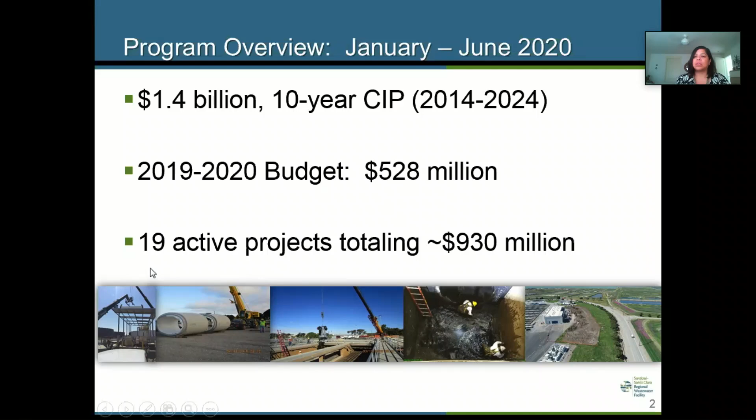Thank you, Mariana. As Mariana mentioned, I'm David Olson, Division Manager with ESD.

For our significant program activities, in February staff finalized the biosolids procurement strategy and implementation plan. The plan recommended a short-term strategy of procuring contracts for hauling and disposing of biosolids processed by the future dewatering facility at the plant, and a longer-term strategy potentially consisting of a combination of a partner facility, city farm, and/or long-term hauling disposition contracts. Staff has begun the procurement and environmental review process for the short-term contracts.

This past fall, staff completed the construction management readiness assessment. The objective was to evaluate the current construction management program and identify any improvements needed to effectively manage the increased number of projects in construction at the plant. Over the past year, staff has implemented a number of these recommendations, including updated processes and procedures, hiring an experienced consultant deputy principal construction manager, adding interim cost and scheduling resources, training city staff on best practices and new procedures, and procuring additional third-party construction management and controls resources.

At a program level, we continue to focus on recruitment and retention. During the second half of this fiscal year, we filled 7 of our vacancies, including a new principal engineer position to oversee our facilities projects.

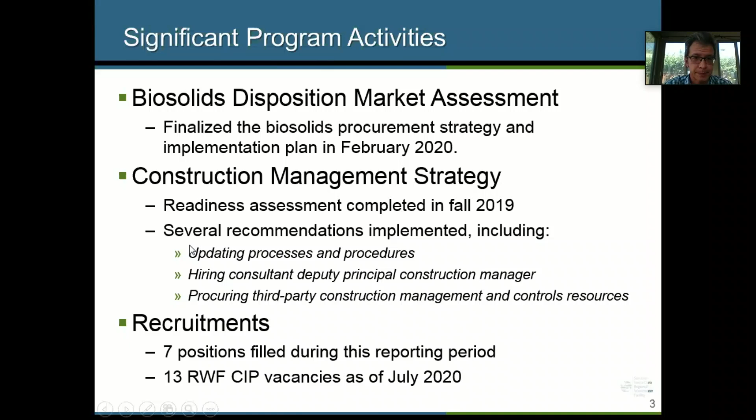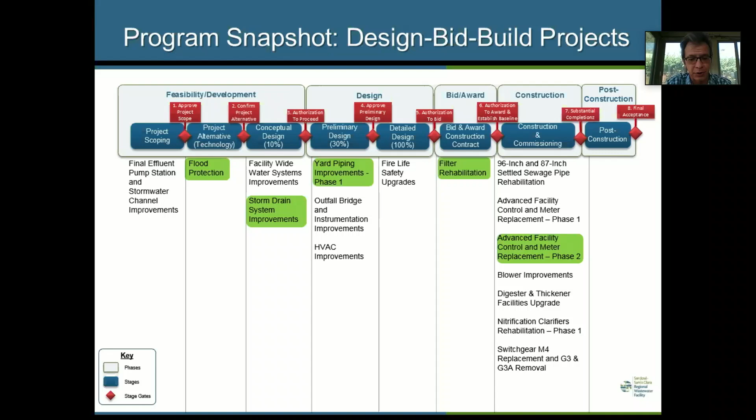As mentioned earlier, we had 19 active projects during the second half of last fiscal year. This chart shows the 16 projects being delivered using the traditional design bid build delivery method. The projects highlighted in green are the ones that advanced a stage in our project delivery model during this reporting period.

Our other 3 projects are being delivered using the progressive design build approach. During this period, our Headworks project, one of our largest projects in the program, began construction. In summary, we had 4 projects in feasibility, 6 in design, and 9 in construction.

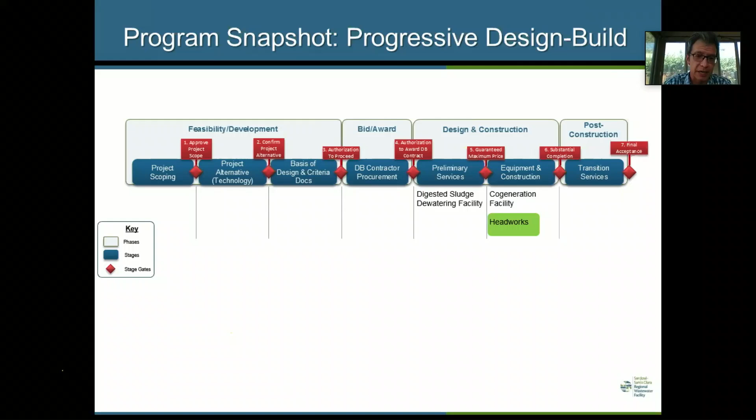Of the 4 projects in feasibility, we continue to scope 2 of those: final effluent pump station and flood protection. We completed the alternatives analysis and began conceptual design for our storm drain system improvements project, and also completed the conceptual design for our facility-wide water systems project pictured here. We finalized the bid documents for an exploratory trenching contract that will help us locate utilities and pipelines to better inform the project's design.

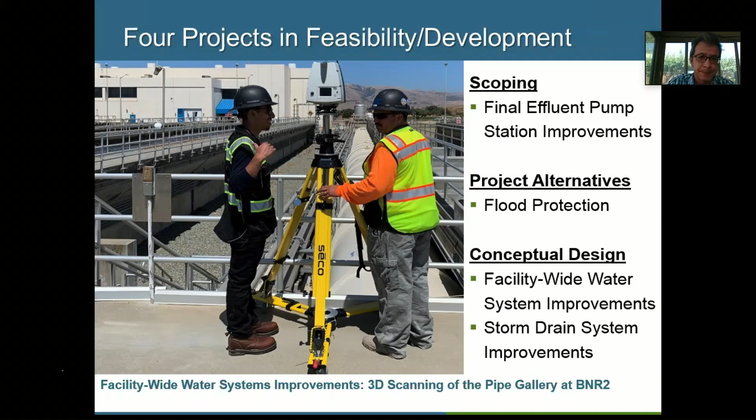For the yard piping improvements phase 1 project, we completed the conceptual and preliminary designs. For dewatering, we conducted several design workshops with the design builder and RWF staff. We also tested a number of centrifuges and visited other facilities to help establish performance standards for the new facility. The design builder also submitted the basis of design report.

Finally, for the filter rehabilitation project, we completed the final design during this period. We also advertised the project in March, opened bids in June, and will be recommending construction award of that project to TPAC and Council this month. Now I will hand it over to Norm to share the construction highlights.

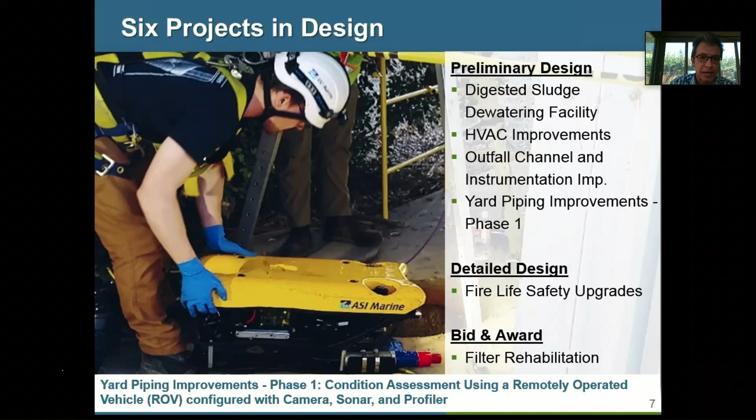Thank you, David. Good afternoon, everyone. I'm Norm Mascarinas, the principal engineer overseeing construction management at the regional wastewater facility. I'll be sharing some of the highlights from the construction activities that occurred in the facility during the second half of fiscal year 1920.

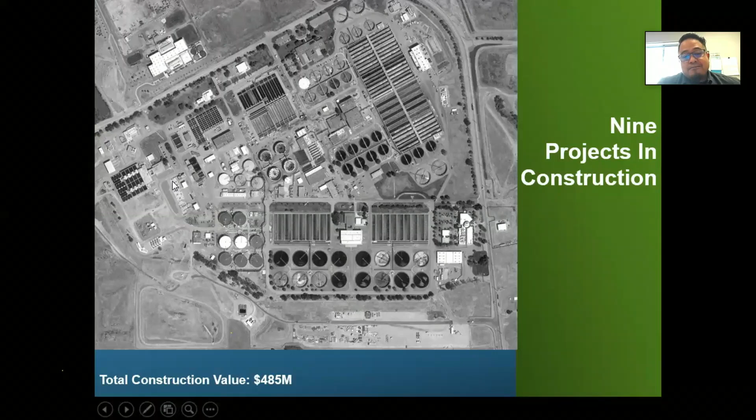As you can see from the graphic, we had 9 projects in various stages of construction dispersed throughout the facility. Therefore, the CM readiness assessment, which David discussed earlier, was critical. You'll notice that the project sites often overlap, and as a result, a lot of effort is done to coordinate construction activities to ensure safety, minimize conflicts, as well as avoid construction delays.

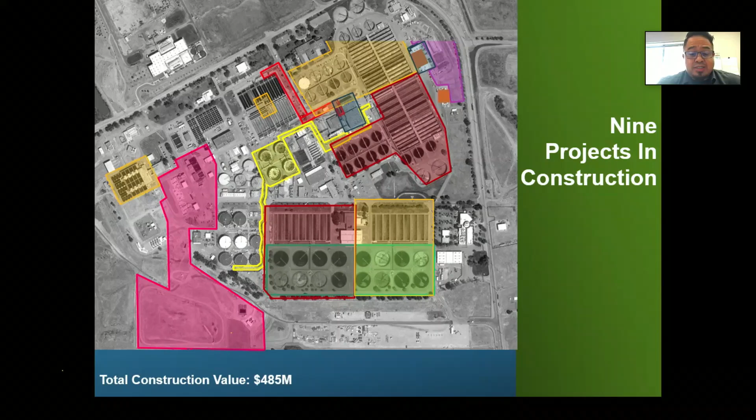The first project I'd like to highlight is the 96-inch and 87-inch settled sewage pipe rehabilitation project. This project scope is made up of 2 pipe segments: the first being the 96-inch pipe, and the second being the elliptical or oval pipe with dimensions of 87-inch by 136. Together, these pipe segments are part of the settled sewage system and are critical pipelines at the RWF. They convey primary effluent to the settled sewage pump station.

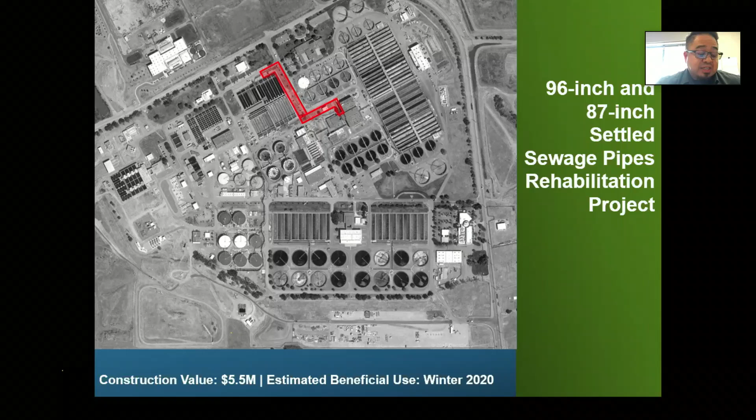Then the flow is distributed to the secondary treatment process for further treatment. A condition assessment on the pipes was conducted in 2017 and 2018 and confirmed crown corrosion in sections of the pipes for both the 96-inch and the large oval pipeline.

As part of the rehabilitation process for these pipes, the segments must be cleaned and free of debris. The photo on the left shows a Vactor truck being used to remove sludge and debris from the oval pipeline. The photo on the right shows contractor staff lowering a remotely operated vehicle, or ROV, into the oval pipeline. The ROV is outfitted with a camera. This is typically done after the pipe has been cleaned to inspect the pipeline prior to rehabilitation.

Significant progress has been made on this project and is expected to achieve beneficial use before the end of the calendar year.

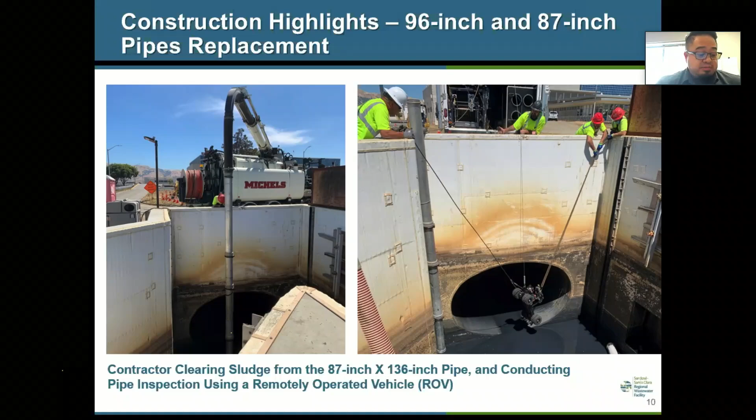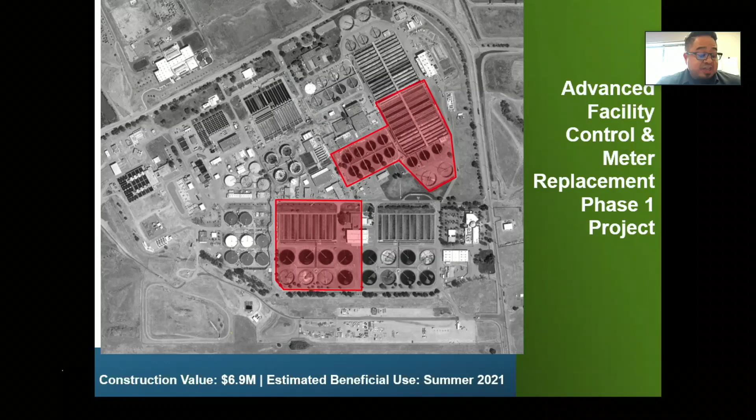The next project I'd like to highlight is the Advanced Facility Control and Meter Replacement Project. This is phase 1 of a 2-phase project. The scope includes replacement and upgrades of control equipment, such as flow meters, valves, actuators, and sensors, with work being done in 2 areas delineated on this map: the secondary battery B, which is the top shaded area, and the nitrification battery B, which is the bottom shaded area.

These photos show the contractor in the process of testing various equipment in the presence of the project inspector. In this reporting period, the contractor completed functional testing on various equipment installed on the secondary B side, with the next step being continuing on to operational testing.

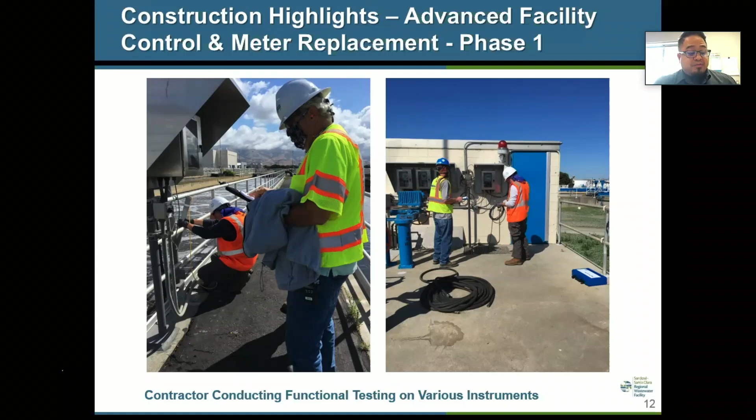On the nitrification battery B side, the contractor has started demolition of the pipes in the B side tunnels. Staff is coordinating the testing, startup, and commissioning activities with the contractor. This project is anticipated to achieve beneficial use in summer of 2021.

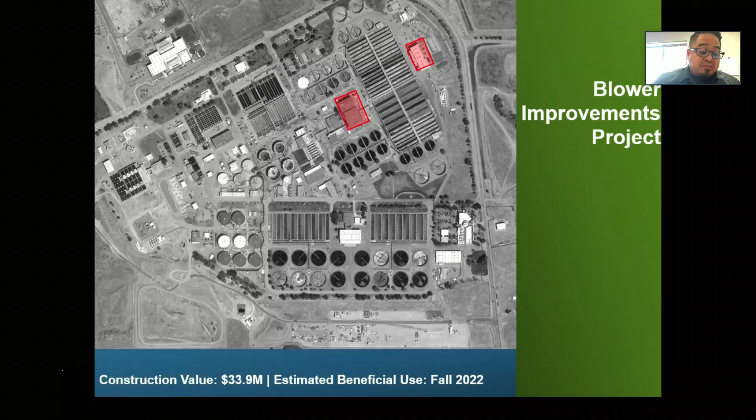Next project to highlight is the Blower Improvements Project. This project will rehabilitate the RWF aeration blowers, including 3 electric blowers in building 40, 6 engine-driven blowers in the secondary blower building, and 5 electric blowers in the tertiary blower building. This includes mechanical and electrical upgrades and decommissioning of some of the older equipment. This project will also improve the operational reliability of the aeration blower system here at the RWF.

During this reporting period, construction work occurred in 2 main areas of the RWF. In Building 40, the contractor worked to complete the new electrical room, which houses a lot of the electrical equipment, including the variable frequency drives, or VFDs, which is a critical electrical component of the blower system. They also performed lead paint abatement on the blower motor skids and skid bases, as shown in the photos.

The picture on the left is the sandblasting operation used to remove the existing paint, and the picture on the right is the newly painted blower skid and framing. In the tertiary blower building, the contractor completed demolition and asbestos remediation work in the bag houses, poured new pads for electrical switchgear equipment, and installed an electrical motor for one of the TBB blowers. So a lot of work is going on.

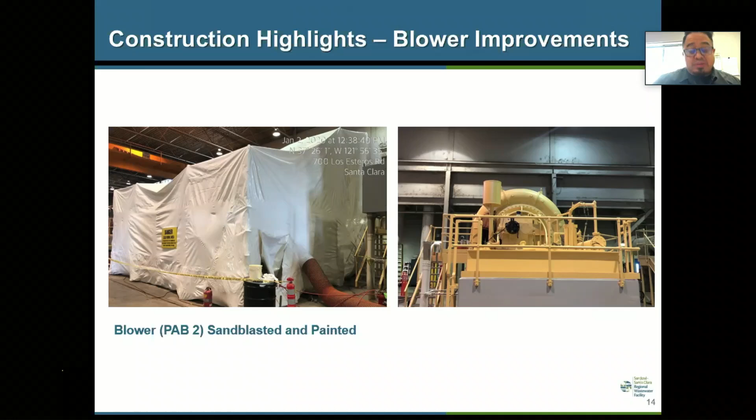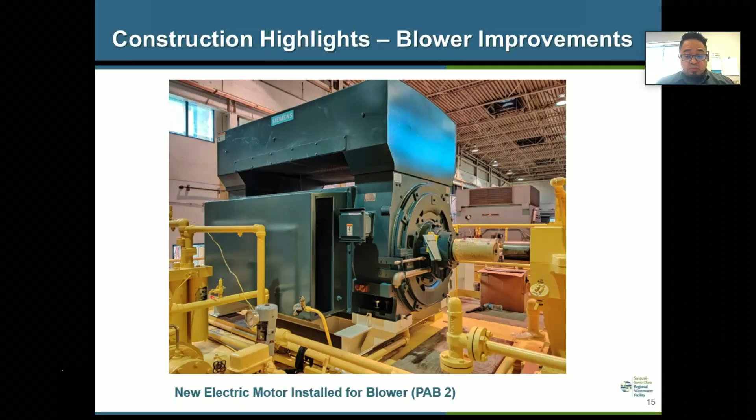Next project is the Cogeneration project. The scope of this project includes the installation of 4 new engines or generators, used to create electricity for the RWF, as well as gas treatment and blending areas, electrical connections and new gas pipelines, heating and cooling loop connections, and the construction of a new power and air operations center, or the PAOC building.

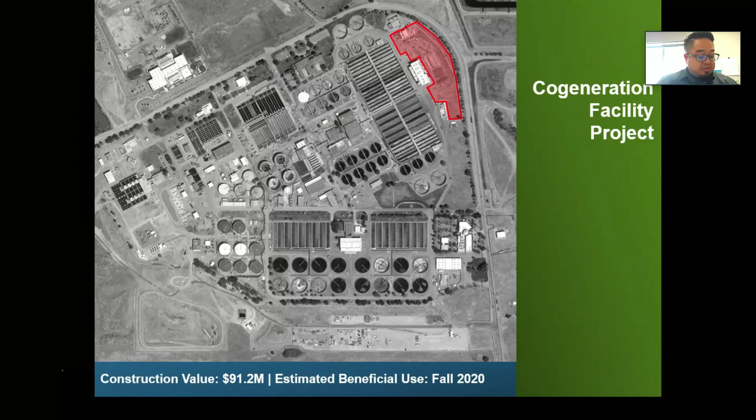A lot of progress has been made during this reporting period, and we have a short video clip to show the progress.

So you see the PAOC building on the left, followed by building 45, where the main generators are housed—4 generators. The next structure is the electrical building, and the last facility is the gas treatment system. The design builder continued finishing work on the PAOC building, such as painting and interior finishes.

In the main generator building, work continues on piping, mechanical and electrical equipment installation. The design builder also performed functional testing on various equipment, including the cooling towers, HVAC systems, the hot water loop system, and the gas treatment system.

This photo is from inside Building 45, the main generator building. The picture on the left shows the gas blending skid tied to one of the generators, and the picture on the right shows one of the large engine generators, comparable in size to a locomotive engine. This gas blending skid combines natural gas with digester gas used to run the engine generators.

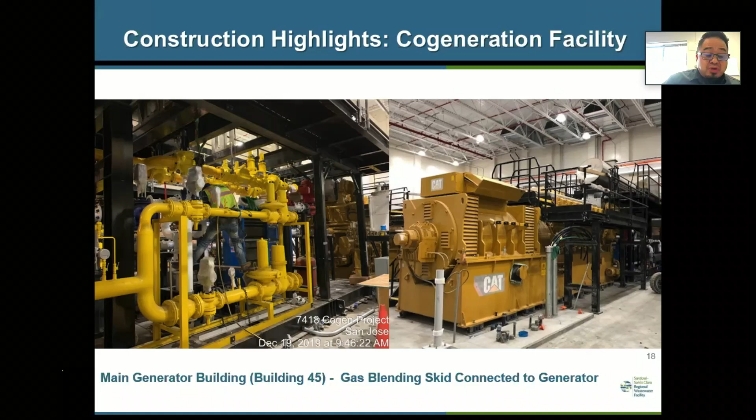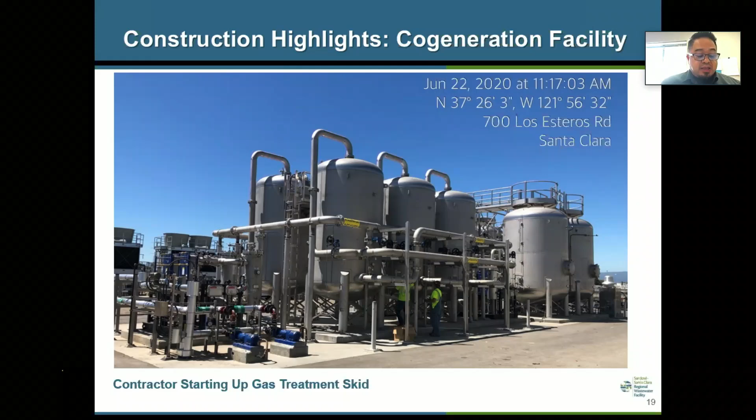Continuing on with the Cogen project, this photo shows the gas treatment system. Its purpose is to remove siloxane and hydrogen sulfide from the digester gas before it's piped into the generators. In June, the contractor started up the gas treatment skid as part of the startup process. Through June, construction was approximately 89% complete, with an anticipated beneficial use date at the end of the calendar year.

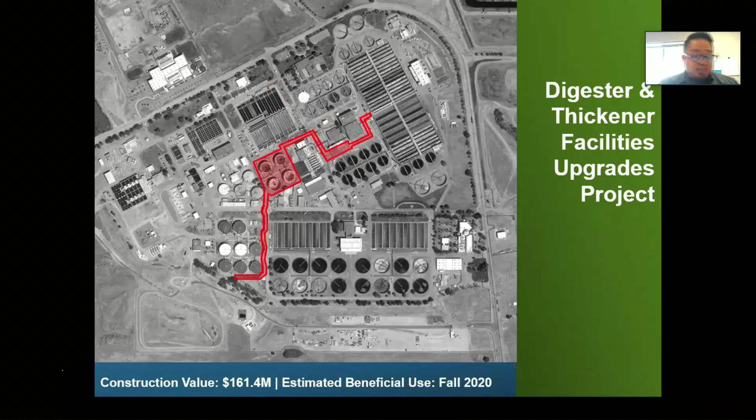Next project is the digester and thickener facilities upgrade project. The scope includes rehabilitation of 4 anaerobic digesters, upgrades to existing dissolved air flotation thickener tanks (DAFT units), installation of odor control, construction of a new sludge screening building, and a new gas piping system.

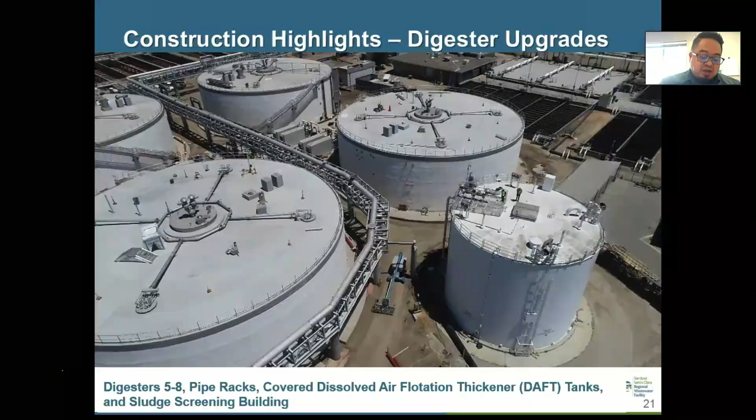We have a short video clip to show construction progress. Here you see the 4 new thermophilic digesters. The contractor installed insulation in the digesters, continued with conduit and wiring, and installed heat exchangers around the digesters. The contractor also installed the pipe rack main columns.

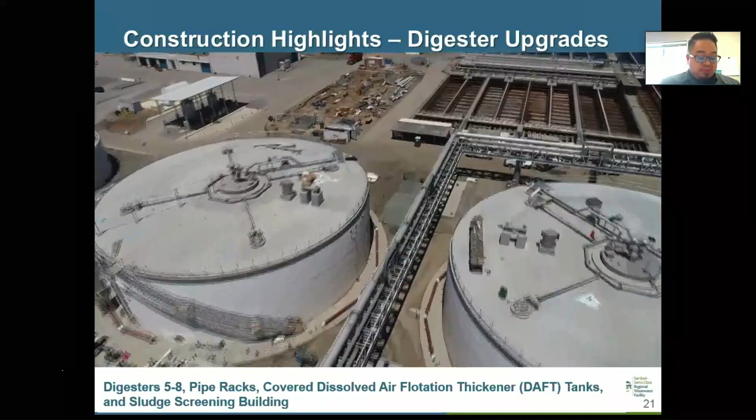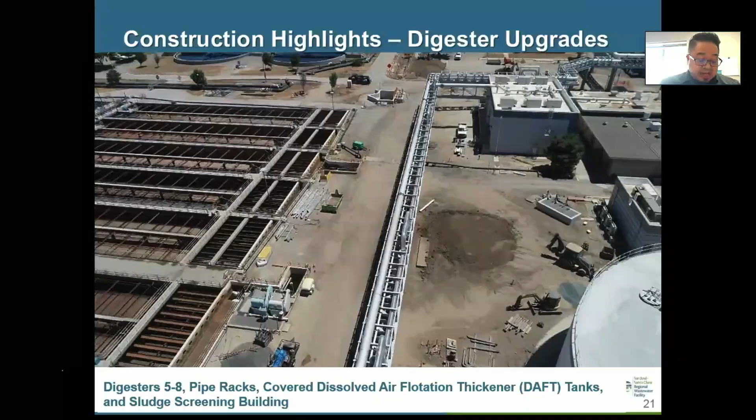As a reminder, the gas pipelines are being removed from the tunnels onto elevated pipe racks to improve personnel safety. The pipe rack is used to convey digester gas, hot water supply and returns, as well as natural gas. The pipe rack runs along C Street, and on the left you'll see the Y structure.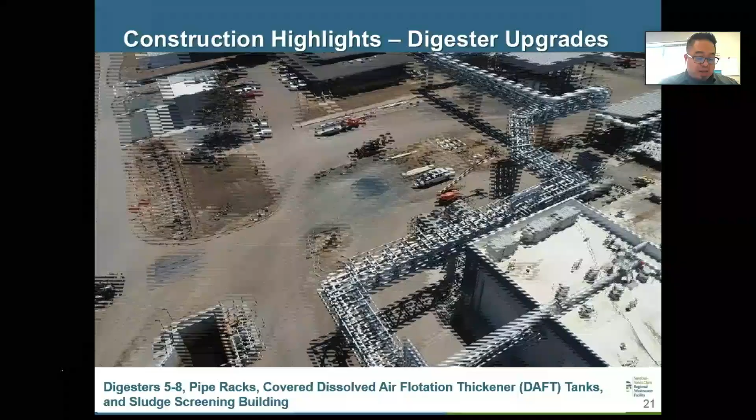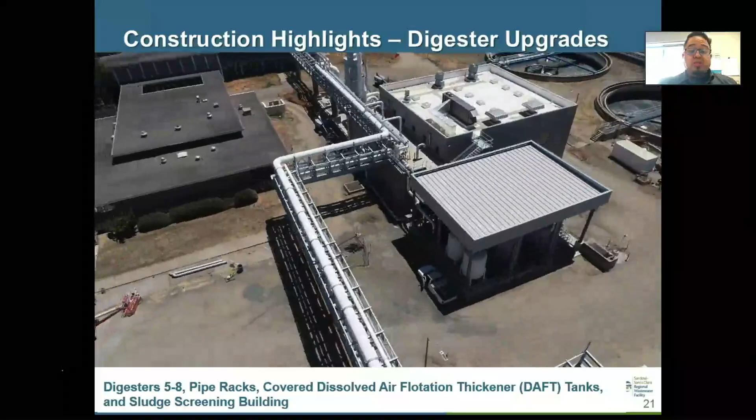We make a right turn on Main Street, and on the right you'll see the DAFT tanks with the sludge pump canopy. Following the pipe rack leads to the new sludge screening building on the right, with odor control right behind it. The pipe rack continues through the SBB, or secondary blower building, and eventually ties into the cogeneration project.

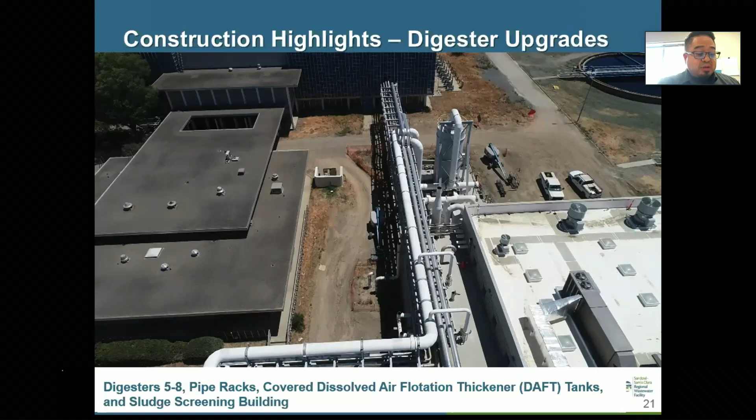Continuing on the digesters theme, the project shows the new covers of the DAFT tanks and the foul air piping systems. This piping system takes the foul air to the biofilters, where it's scrubbed as a means of odor control.

Through June, construction on the project was about 90% complete. Beneficial use is anticipated sometime in fall 2021.

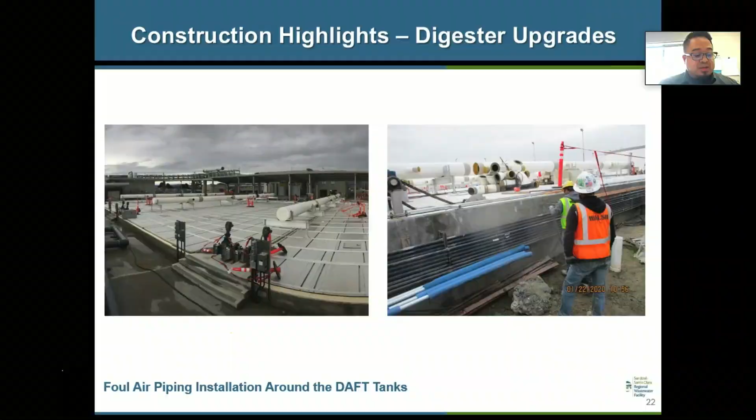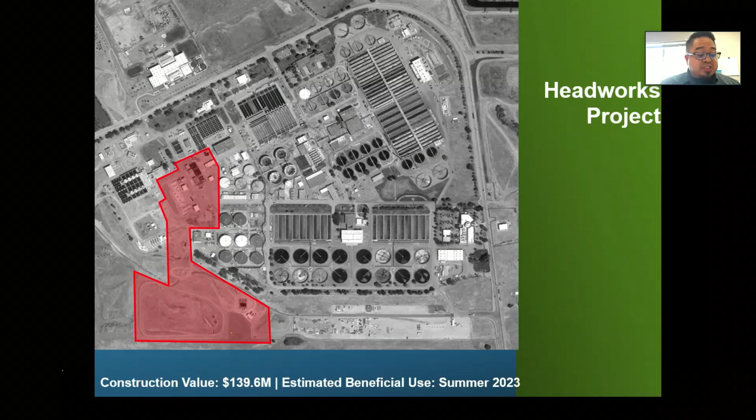Moving on to the Headworks project. The scope of this project will be to replace the aging and deteriorating Headworks 1 with the new Headworks 3 project, and to make improvements to the existing Headworks 2 to ensure long-term operation and reliability.

The NTP for this project was issued in March of this year. A lot of preliminary site work was done during the reporting period, including site preparation activities such as installing stormwater pollution prevention plan measures, restrictive fencing for habitat, trenching operations for temporary electrical and fiber optic connections, excavation for the tower crane foundation, and installation of a tower crane base, which includes a significant amount of reinforcing steel and concrete.

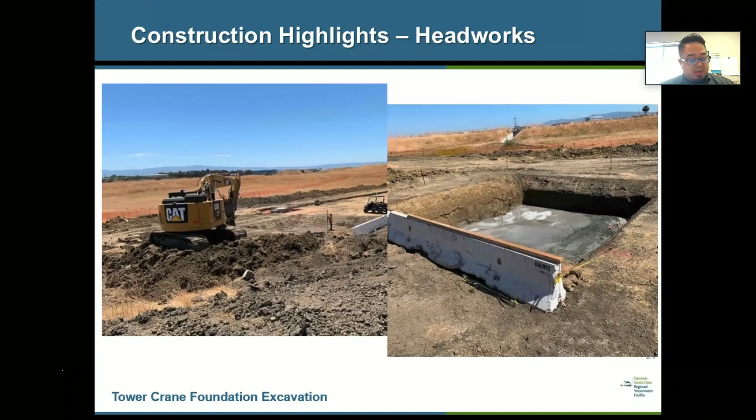Continuing on with the Headworks project, construction activities started in June and included relocation of existing pipelines, installation of temporary power and fiber optics, grubbing of the site—essentially removing some of the existing vegetation—as well as creating a solids disposal area.

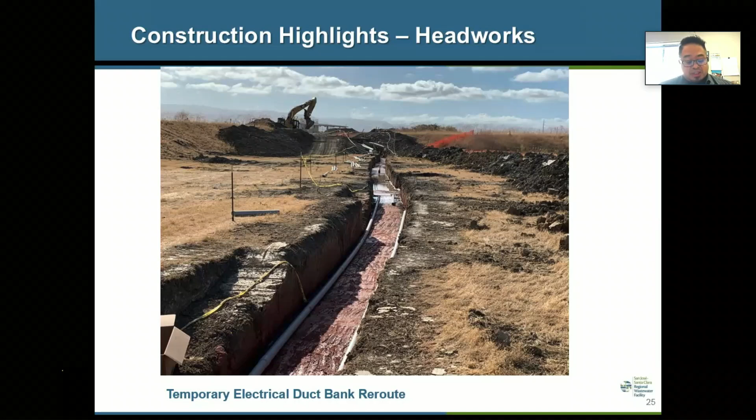This picture shows the temporary electrical duct bank reroute. In the background, you can see the excavator digging the trench for the duct bank. This project has made significant progress and we'll continue to provide updates. Beneficial use of this design build project is anticipated in summer 2023.

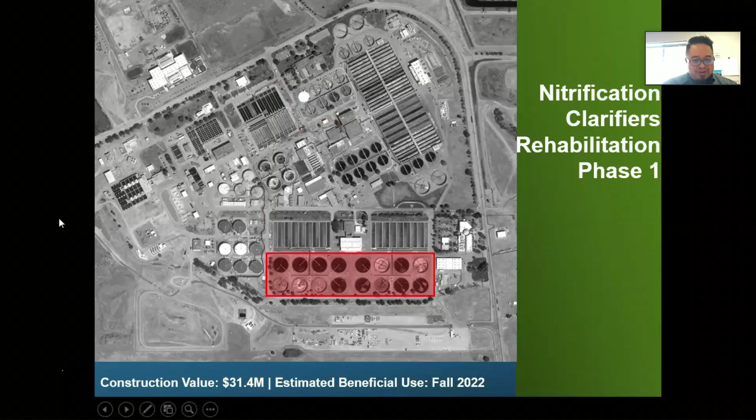Moving to the next slide, nitrification. The nitrification clarifiers rehabilitation phase 1 project is the first phase of another two-phase project. The scope of phase 1 is to replace the mechanisms and related equipment for the 8 clarifiers, rehabilitate up to 8 return activated sludge or RAS pipelines, replace drain and return activated sludge valves serving the A and B sides, rehabilitate groundwater pressure relief valves, replace electrical and instrument and control equipment for all 16 clarifiers, and install groundwater monitoring wells.

For the majority of this work during the reporting period, construction management staff reviewed contractor submittals, RFIs, requests for information on equipment and instrumentation, work plans, and process shutdown requests. In June, the contractor started draining clarifier B8 for groundwater, constructing temporary access for clarifiers B8 and B6, and trenching for electrical conduits. This aerial photo shows the 8 B-side clarifiers in the background and the 8 A-side clarifiers in the foreground. The beneficial use date for this project is anticipated for fall 2022.

This concludes the construction highlights, and I'll hand it back to David to wrap up the presentation. Thank you. All right, thank you, Norm.

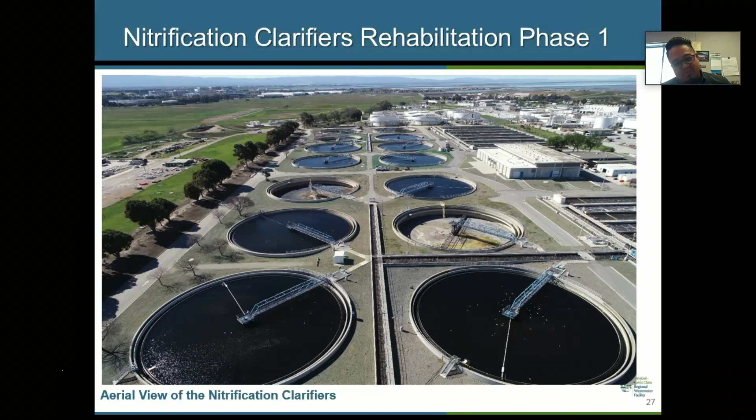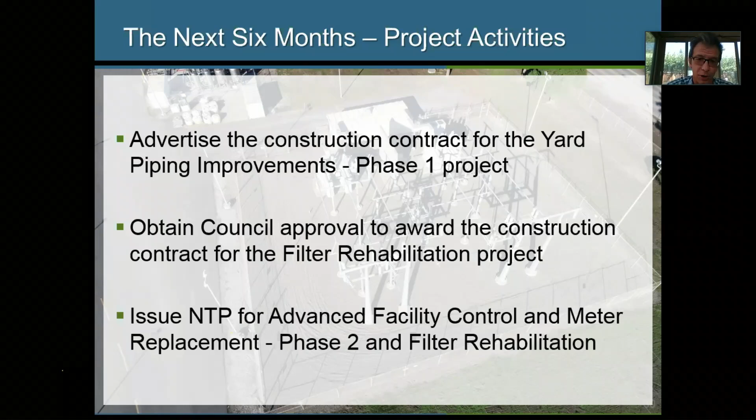Looking at the next six-month period, we'll be advertising the yard piping phase 1 project for bid. We'll be returning to council later this month to recommend award of the filter rehab project, and we'll start construction on 2 projects: the advanced facility control and meter replacement phase 2 project, and filter rehab.

For the program, last month council awarded new construction management agreements. Next month, staff will be returning to recommend award of new construction management controls agreements to support projects in construction. We will continue to implement the construction management and testing, startup, and commissioning strategies, and continue to fill our remaining vacancies. That concludes our presentation, and we're available to answer any questions you may have.

Thank you, Knapp, Mariana, David, and Norm. That was a very comprehensive report. I appreciate that. We do have one member of the public who would like to speak, so we'll go to them before we turn to my colleagues for their questions. Blair?

Hi, thanks for unmuting me. That was a nice word, a very comprehensive report. It was nice to just sit back and listen to the makings of our city. I know David Wall, who used to be a regular at rules and open government meetings for years, up until about 2016 when he moved up north. He'd often return to the subjects talked about here today, and he had really in-depth knowledge about how to add different ideas to the wastewater management plant, some unique. They may not always have been the greatest, but that's where he used to work, so he had good knowledge and gave a real reference point for this sort of work. I'm interested if you're still in touch with him and he writes you letters about these things, and perhaps I can give a formal call out to him over the airwaves here, and hopefully he can look into this stuff and add his two cents. Every bit of advice can help, and you offered that with this presentation. Thank you, good luck, and thanks for your time.

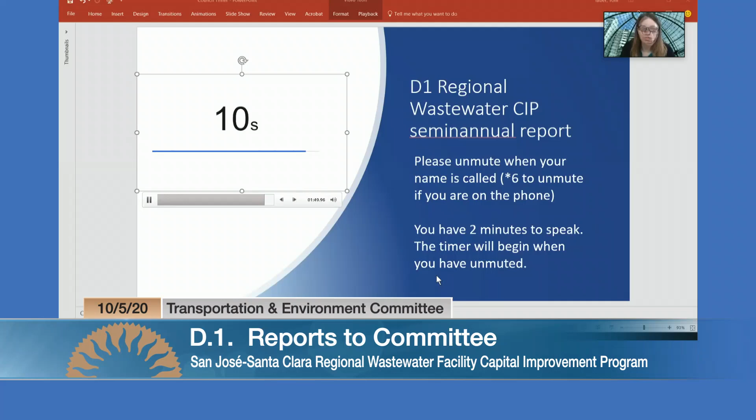Thank you. Turning to my colleagues, does anyone have questions or comments for the team? No questions, but I'll move approval.

Second. Thank you, I just have a couple of questions. One is about the biosolids. Second, thank you. We've got a motion and a couple of seconds. I think it's going to pass, you guys.

The biosolids disposition long-term strategy, what's the timeline for determining which of the options you're going to go with? I know you had talked about either a partner facility, potentially a city facility, and or long-term service contracts. What's the timeline for figuring out the long-term plan, and what's the duration of the short-term contracts going to be?

Nap, you want me to answer? Sure, Mariana, go ahead. Okay, so thank you for the question.

We are in the process of determining all that, but let me give you an advance of what we're doing. We've already started talking with different people interested in partnerships. There is interest, however I think that's going to take a little longer to develop because of the implementation timeline. So we already have a number of short-term contracts we're looking into, and we're working on putting those procurement documents together in the next year. That will be a short-term solution for the first 3, maybe 5 years, so we have a way to get all our biosolids to a place that can take them for reusable purposes.

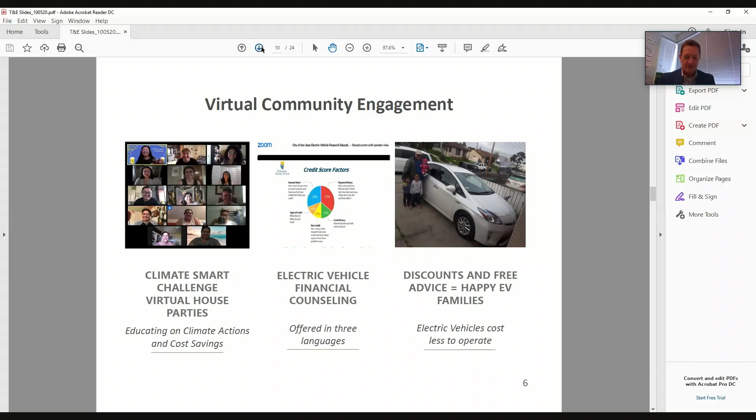Pillar 1, climate smart, a sustainable and climate smart city. As we strive to reach our own electric vehicle goals and now those of the governor, one area of needed attention is the charging infrastructure to get all of those and keep all those electric vehicles charged.

Our recent REACH code on new construction mandates some of that, but a huge piece of that will come from Cal EVIP, which I'm sure will be covered in the next presentation in depth. That leveraged millions of state dollars against some matching funds locally to get more charging stations put out there.

Building electrification - it's hard to believe our building electrification REACH code is now almost a year old. So happy birthday, REACH code. Our interdepartmental team was really proud to be recognized by SPUR last spring, but we're not done yet. As Carrie mentioned, we'll be returning to council next month with a proposed expansion of that gas ban.

Natural working lands - we are working on a couple new elements to Climate Smart. Climate Smart Phase 2 will include a natural and working lands analysis, which will research the interplay between natural and working lands and community-wide GHG emissions. And the zero waste element will take an updated look at our solid waste and recycling streams to see where we can improve the Good Life 2.0 while lowering GHG emissions from that sector.

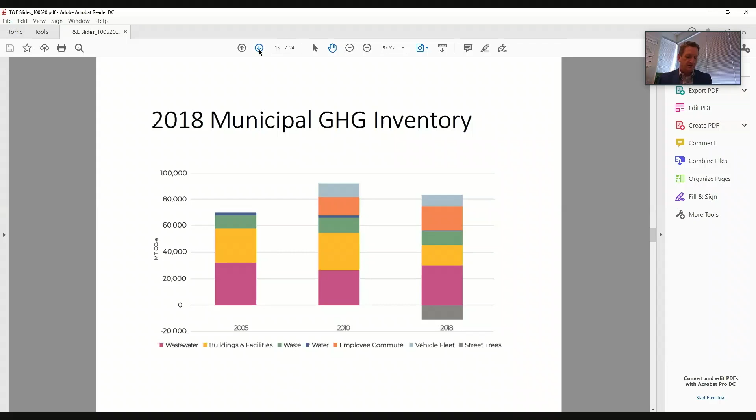And then just for perspective, as you saw in the last presentation, treating wastewater to very high standards for about half the county certainly requires a lot of energy and upgrades to that facility.

Pillar 2, transportation. Access and mobility plan - working very hard on that plan, and Ramses will be covering that shortly.

Parking management and pricing. The city committed to the recently extended - in case you haven't heard - our American Cities Climate Challenge will now go through June of next year, so we're excited about that. It'll give us a chance to finish up on the parking policy adjustments that we're looking at and keep them consistent with our climate smart goals and Envision 2040.

So we'll continue on that effort to partner with SPUR, the Urban Land Institute, and Nelson Nygaard into next year to comprehensively evaluate and pursue updated parking requirements for new development, to design a parking strategy that will enable no and low parking development, particularly around transit.

Based on that strategy, which will include a broad range of stakeholder input, we'll develop end products that will modernize parking requirements and accelerate the adoption of multimodal solutions we need to drive GHG down.

Drive Electric San Jose is still available till the end of this month, so if you are in the market for an EV, now is the time to act. I know a guy who knows a guy - we can get you connected, and the discounts are piled on top of existing state and federal incentives, and it can total up to $13,000 in savings.

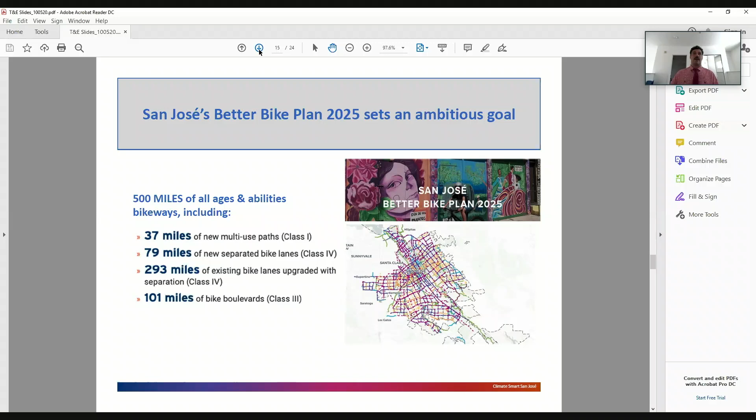One of the most impactful things that will probably happen in the next few years is the passage of the Better Bike Plan, which will actually be going to full council tomorrow night. So we're really excited about this plan. It's one of the major pieces of us all trying to meet these really ambitious mode split goals that should get us there.

Let's go to the next slide. We are, of course, also continuing our annual programs and really bringing in some innovative thinking and world-class thinkers to help us get there. So this year, this is our big bike projects list. You can see you're getting over Highway 101 with San Antonio Street. We're doing road diets or other major treatments on the rest of these. And the one we'd really like to highlight here is 10th and 11th, just outside of City Hall here.

We're doing what's called a frontage lane with protected intersections. This is a pretty innovative approach that gives the local folks who live on the street a lot of protection and slows the traffic down for them, and in effect creates these tiny little cul-de-sacs for the people who live on the side of the street, but then at the intersections, only bikes can get to the corners, so cars will have to get in and out of these little frontage lanes. We think this is a really great approach to a road that's used at much higher speeds than it should be.

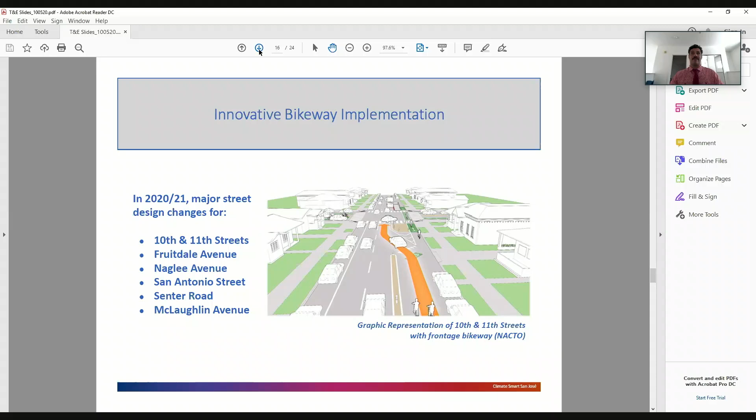And carries a lot of traffic, but also is a major bike north-south connector. So we're really proud of this. We worked with NACTO, which is the National Association of City Transportation Officials, and brought together folks from across the country to try to solve this problem. It's a pretty difficult one since we have all these single-family homes on either side.

Next slide, please. All right, and then of course there's the Access and Mobility Plan. This is really our attempt to meet these goals. We've been given the direction, we've been given the place to try to get to, but as the mayor's noted, what's our plan to actually get there? And so we've dug into this.

We've actually brought this to you guys a couple times already. But again, this is the big one for us in terms of a 10-year work plan for DOT and the city to really move transportation from its current single occupancy vehicle focused system into a multimodal system. Do follow Move San Jose on Twitter, Instagram, and Facebook. This is kind of our persona in the digital world that's bringing forth this plan, as well as a lot of other plans. And there's now a great website that's bringing most of our transportation planning efforts in one place, so people can learn about them at once.

Next slide, please. So as you guys know, what we've been able to do with the Access and Mobility Plan so far in phase one was, in a sense, get all of the things that council has told staff to do around policies set around transportation and bring them into one document so that we can digest it. Because it's a pretty huge area. It's the most valuable in terms of money asset the city has, and also the biggest land holding the city has.

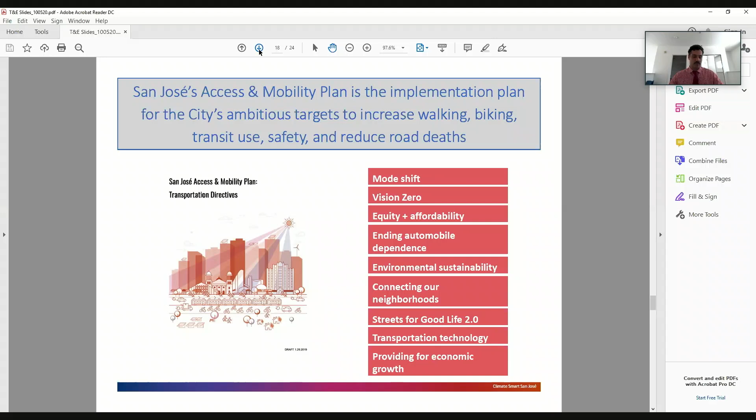Now we're really working on how do we get there. What are the strategies that will work, and what will they look like in different parts of the city? What's going to work in Cambrian is not going to be the same as downtown or in parts of East San Jose. There's a lot of diversity in the city, so we're making sure to incorporate all of that. We're doing a lot of data collection and purchasing to get our heads around the totality of the problem. The diversity and size of our city is immense, and creating strategies that work across the whole city is a big task, so getting the data together is an important piece.

We're also going through an organizational assessment. As part of our contract, the outside consultant is helping us think through how to structure DOT in terms of workflows and even personnel structures, to see if we're lined up to meet these goals and what ways we could improve to get there.

And of course, we're also implementing this internally. We've expanded the telework program, though I think that's a little bit by default. We appreciate that. Take your wins when you can, and hopefully it continues on.

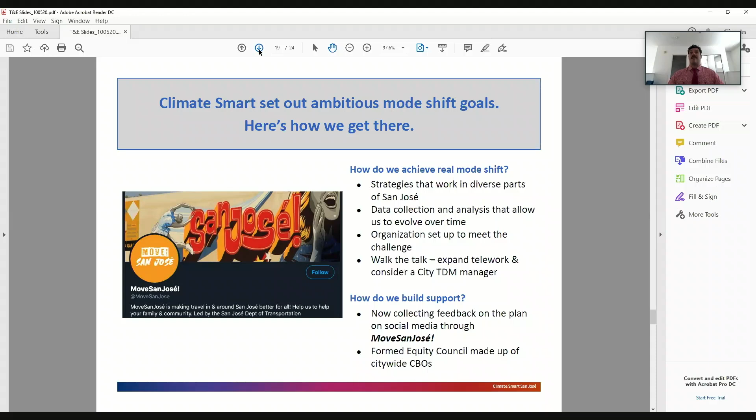Ken's already touched quite a bit on this, I'll just say a little more. We have the Drive Electric San Jose effort going on. We were able to get in with about 5 dealerships, with really great discounts. I know at least 3 people who have used them that really drive down the price of electric vehicles. We're currently slated to go to October 31st, and we're talking about if we can get it extended or do it again. We shall see.

The last piece I'll touch on is the free EV financial counseling. One of the biggest complaints about electric vehicles, as well as the governor's new executive order to make only zero emissions vehicle sales after 2035, is the equity issue. At the moment, people see electric vehicles and think Tesla. So helping people access these, whether used or some of the less expensive models out there, is important, and bringing that knowledge out to the public is a key piece of the puzzle.

Thanks, Ramses. Finishing up with Pillar 3, an economically inclusive city of opportunity. We have developed a fantastic web platform to help guide residents in 3 languages on how to reduce their carbon footprint and energy costs. It's really fun to use, and I'm going to show you some examples of that on the next slide.

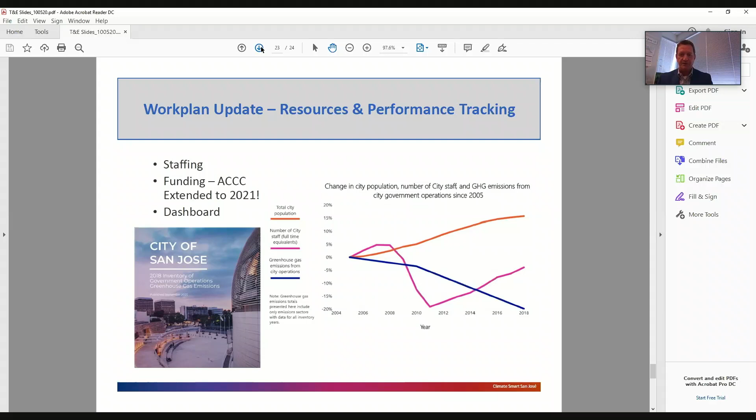And with that, we will be happy to take any questions.

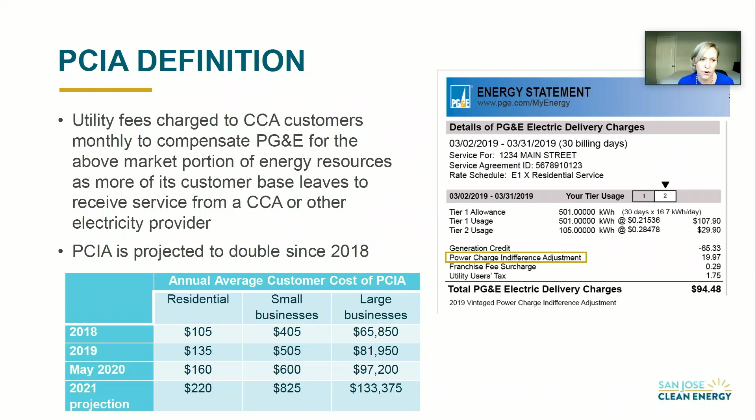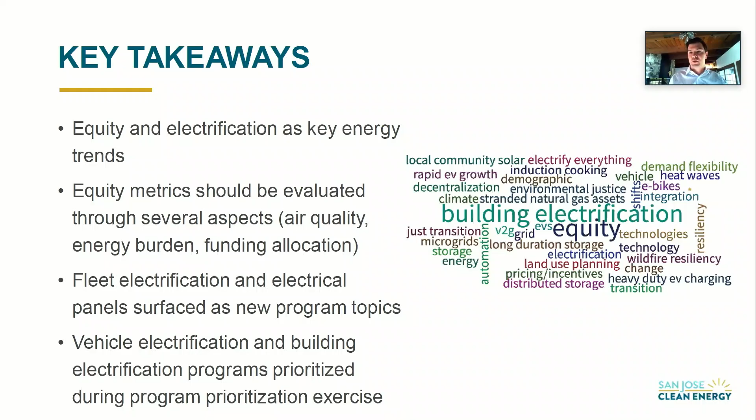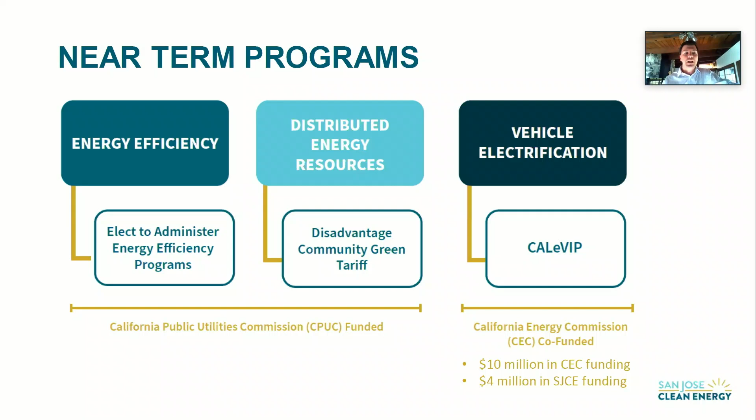Next we will talk about updates in the near-term programs in the roadmap. In the near term, meaning in the next 2 to 3 years, SJCE will pursue the following programs that are either externally or co-funded by state agencies. For CALeVIP, this program was a unique opportunity for the city to receive $10 million from the California Energy Commission based off of SJCE investing $4 million. In the next slides, we will provide updates on each one of these programs.

So the California Electric Vehicle Infrastructure Project, also known as CALeVIP, which was approved by City Council one year ago, will start to receive applications on December 16th this year. In addition to the 25% of rebates that are directed towards low-income and disadvantaged communities, the program is also offering free technical assistance to properties located in these areas.

Currently, SJCE is conducting direct outreach to targeted properties, and Lori's reaching out to your offices to collect properties in your district to direct our outreach efforts. So feel free to reach out to me directly with those properties.

The following are 2 programs funded through the CPUC that SJCE will be seeking City Council approval to apply for.

Energy efficiency programs are funded through the Public Purpose Program Charge, which shows up on San Jose residents' electricity bill. SJCE has engaged a consultant to support our application for this complex process, and we plan to file the advice letter in Q1 of next calendar year. Funding is still to be determined as it relies on a number of variables, but we expect funding to be in the range of $1 to $2.8 million annually.

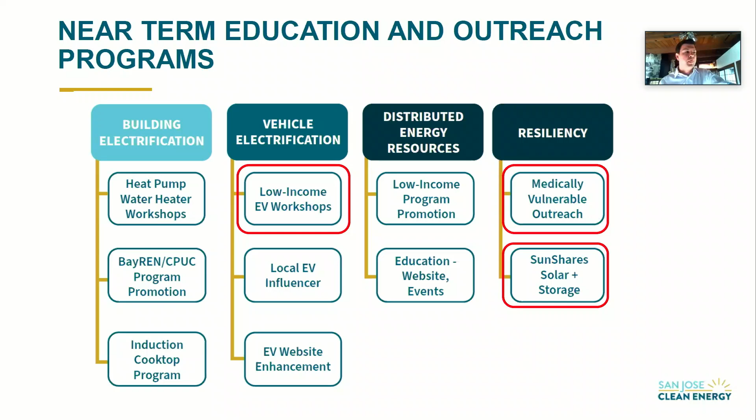I'll introduce the programs circled in red that are already underway. We've done 3 virtual workshops so far in Spanish and English, and have another one planned in Vietnamese. San Jose Clean Energy's role has been both to promote this program and to present on electric vehicles. The presentations from these events are on our website, and all the information on electric vehicles, Drive Electric, and this program is at San Jose Clean Energy slash EV.

We are also working to promote 2 programs that provide backup power options for San Jose residents in the event of PG&E power shutoffs. The Bay Area SunShares program offers limited-time discounts for San Jose residents to buy a new solar system, install a solar-plus-battery storage system, retrofit an existing solar system to include battery storage, or add battery storage alone.

These discounts last until the end of November, and we are actively promoting this program, with a series of webinars ongoing for residents to sign up.

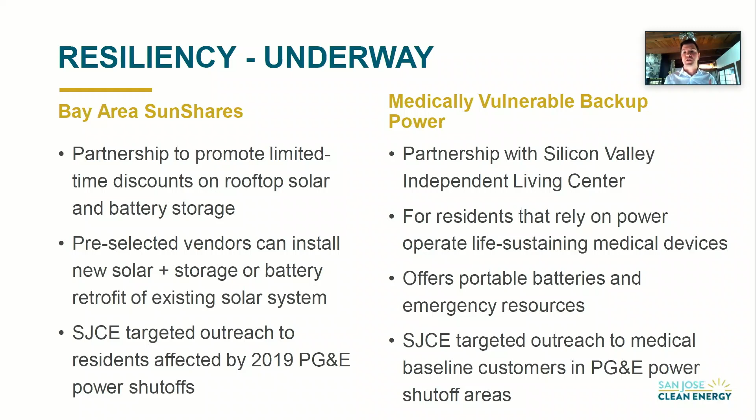Another program we are working to promote is in partnership with the Silicon Valley Independent Living Center, which offers a number of solutions for medical baseline customers who rely on life-sustaining medical devices. These solutions might include rental of a portable battery system to power critical medical devices, or other emergency resources such as hotel vouchers if and when a PG&E power shutoff happens.

The final updates we'd like to provide are in regards to the equity metrics as part of the program selection process, as well as future programs.

For example, if we looked at a used electric vehicle program, we would ask ourselves how much those used electric vehicles will bring down air pollutants, and how much it will actually save on the energy spend of low-income community members. We're working through these, and the important part is to provide a menu of options to understand this issue from multiple angles.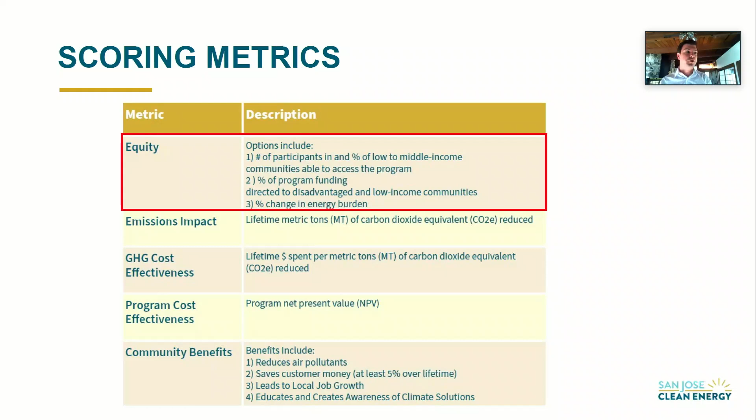In our previous version of the program's roadmap memo, we presented a list of specific program ideas that could translate into future programs. Considering the significant changes that will happen in the market and the community over the next 2 to 5 years, before SJCE can introduce self-funded programs, we decided instead to include a list of program topics around which future programs will center.

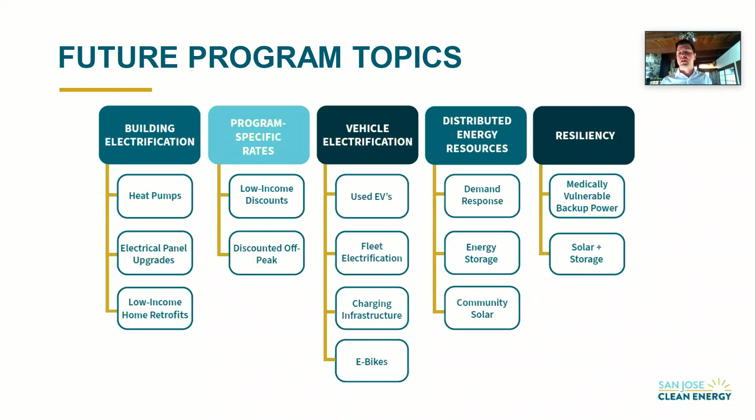So to close, our recommendation is for the committee to accept this update on the SJCE program's roadmap, and that concludes our presentation.